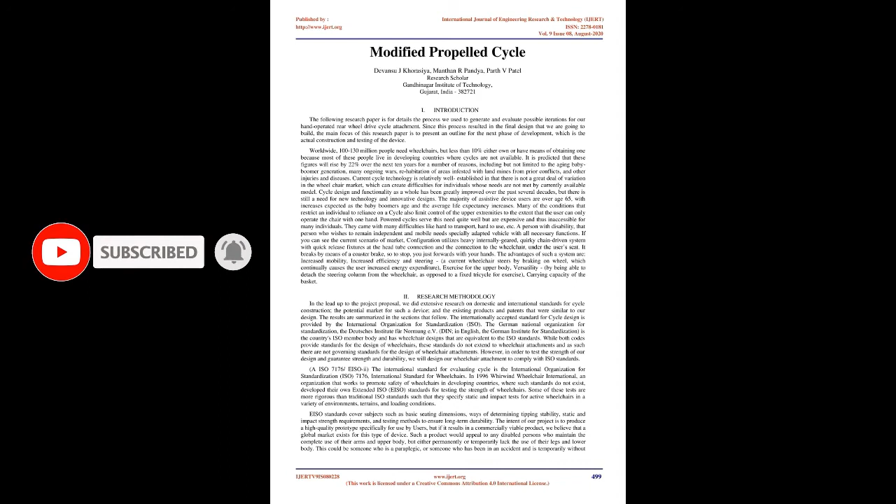The majority of assistive device users are over age 65, with increases expected as the baby boomers age and the average life expectancy increases. Many of the conditions that restrict an individual to reliance on a cycle also limit control of the upper extremities to the extent that the user can only operate the chair with one hand. Powered cycles serve this need quite well but are expensive and thus inaccessible for many individuals. They come with many difficulties like being hard to transport, hard to use, etc.

A person with a disability who wishes to remain independent and mobile needs a specially adapted vehicle with all necessary functions. In the current market, the configuration utilizes a heavy internally geared, quirky chain-driven system with quick-release fixtures at the head tube connection and the connection to the wheelchair, under the user's seat. It brakes by means of a coaster brake, so to stop, you just push forwards with your hands.

The advantages of such a system are increased mobility, increased efficiency, and steering. A current wheelchair steers by braking one wheel, which continually causes the user increased energy expenditure. Exercise for the upper body, versatility, by being able to detach the steering column from the wheelchair, as opposed to a fixed tricycle for exercise, and carrying capacity of the basket.

2. Research methodology. In the lead up to the project proposal, we did extensive research on domestic and international standards for cycle construction, the potential market for such a device, and the existing products and patents that were similar to our design. The results are summarized in the sections that follow.

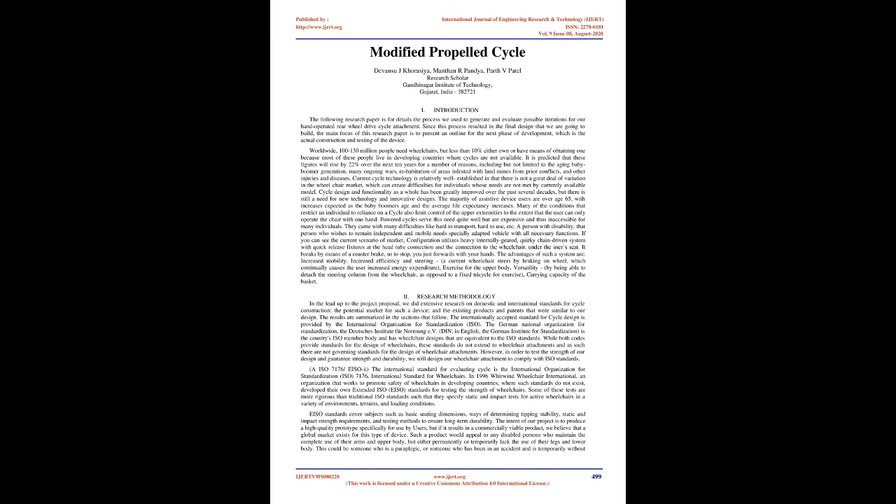The internationally accepted standard for cycle design is provided by the International Organization for Standardization, ISO. The German National Organization for Standardization, the Deutsches Institut für Normung, DIN, in English the German Institute for Standardization, is the country's ISO member body and has wheelchair designs that are equivalent to the ISO standards.

While both codes provide standards for the design of wheelchairs, these standards do not extend to wheelchair attachments, and as such there are no governing standards for the design of wheelchair attachments. However, in order to test the strength of our design and guarantee strength and durability, we will design our wheelchair attachment to comply with ISO standards.

ISO 7176/EISO, the international standard for evaluating cycles, is the International Organization for Standardization ISO 7176, the international standard for wheelchairs. In 1996 Whirlwind Wheelchair International, an organization that works to promote safety of wheelchairs in developing countries, where such standards do not exist, developed their own extended ISO, EISO, standards for testing the strength of wheelchairs.

Some of these tests are more rigorous than traditional ISO standards, such that they specify static and impact tests for active wheelchairs in a variety of environments, terrains, and loading conditions. EISO standards cover subjects such as basic seating dimensions, ways of determining tipping stability, static and impact strength requirements, and testing methods to ensure long-term durability.

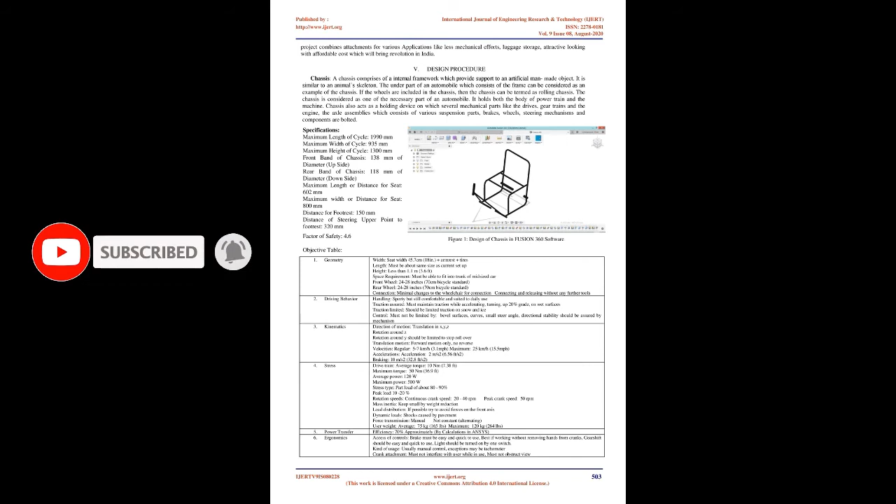E. Universal joints. A universal joint is a joint in a rigid rod that allows transfer of rotary motion of the rod, while allowing the rod to bend at an angle, usually up to 45 degrees. Universal joints are used in series to raise the angle that a rigid shaft can bend and still permit transfer of rotary motion. U-joints are commonly used in a variety of light and heavy-duty applications including automotive applications. U-joints are strong and readily available and can transmit high torque and high-speed rotation.

F. Rear drive method. The rear drive method subsystems are basically ideas for the mechanism that will transfer power of driving from the steering of cycle to the drive wheels. This mechanism is easy to semi-permanently mount to the wheelchair frame with minimal modification to the wheelchair. Final design is selected from the analysis of the following configurations because we need to maintain the modified mechanism of steering that the wheelchair utilizes without having any frictions engaged, and still maintain efficient power transfer.

G. Propelled drive. A tricycle/cycle which may be propelled by the arms of the rider and that is supported thereon in a prone position. The forward or drive wheel is driven by the rider as he grasps a pair of hand grips which respectively are rotatively attached to a pair of opposing crank members. A typical coaster brake couples the crank members to the drive wheel to enable the rider to cease turning the crank members for coasting, steering, and braking purposes.

A slide bar is included which is established in part by one of the crank members and enables one of the hand grips to be shifted from a drive position wherein the hand grips are radially displaced 180 degrees from the other to a coaster steering position wherein the hand grips are radially aligned one with the other.

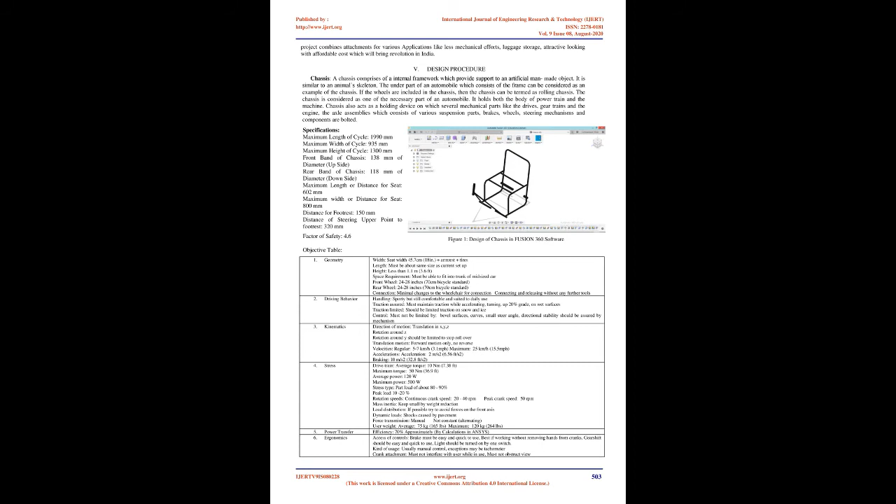I. Braking and propulsion. Cycle moves forward and reverses directions by propulsion system and brake must be able to slow down the cycle in addition to bringing it to a stopping position. As we know the basic function of brakes is to slow or stop moving wheels to prevent loss of control of cycle. In the general practical uses of modified propelled cycle we considered 35 pounds of grip force to actuate. Individuals with disabilities and the elderly both may have moderate to severely diminished physical strength capabilities compared to able-bodied adults.

J. Working principle. When the user applies his/her efforts on steering in forward and reverse direction, crank and connecting rod provide the motion to the wheelchair by converting the to and fro motion into rotary motion. Simply, the user makes force on the steering to move the steering forward and backward. The direction of motion of the cycle is controlled by steering.

K. Concepts. We tried to standardize the process of generating concepts by using a blank wheelchair template for our sketches. We assigned names for each concept based on the options for each as given by the decision matrix. For every concept we considered the power transfer, rear drive type, coupling, gear shift, braking solutions, etc. Each concept has their different advantages and disadvantages, and all concepts have their own abilities. From all those concepts we have to choose one with the highest effectivity.

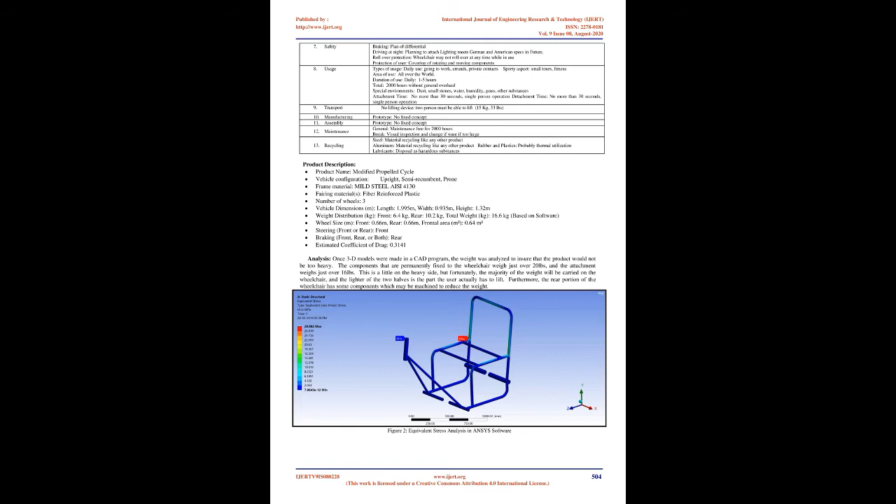Physically handicapped people have many problems. Assuming little or no use of legs or feet, particularly since paraplegia springs to mind, they very often have difficulties rising from bed, getting into their chair, dressing below the waist, moving from chair to toilet and back, and wiping themselves before returning, reaching for any items on or above standard height vanities and kitchen cabinets and above center line in refrigerators, finding and using common furniture such as couches and recliners, getting through house doors, especially closing doors behind them,

getting from door to parking lot over curbs, getting from chair to vehicle, sometimes riding in their own chair in a specially equipped van, driving, exiting their vehicle, usually but not always made easier by a rear exit ramp, getting from parking lot into many institutions or places of business over curbs and up steps and over thresholds, reaching over standard height counters, reaching higher grocery store shelves and cooler cases, fueling their vehicles at self-serve stations,

getting around in narrow business aisles, especially when normally abled people have parked their shopping carts in the middle of the aisle and are jabbering to someone on a cell phone, traveling by any form of mass transit, bus, train, airplane, passing through metal detectors. One of the main problems faced by disabled peoples in this modern era is the high cost of the equipment used in facilities provided for them, which leads to less productivity and more labor work in cultivating workshops.

In order to minimize the problems of disabled peoples, we have designed an economical and affordable modified propelled cycle which can perform very effectively for them. In order to maximize the benefits of the product, we have also planned our design so that normal people can also use the product in place of today's era's costly vehicles. We are planning to use some attractive looks and materials in the fabrication process, as well as designing our product to give the highest comfort level to the customer.

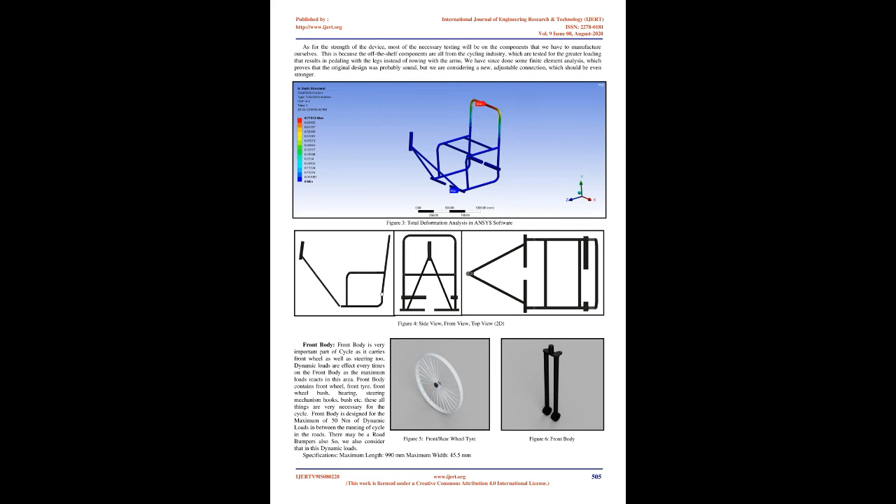This project deals with the solution of basic problems faced by the poor people of India, like the high equipment cost used in manufacturing and high labor cost, which ultimately leads to less productivity of cycles. Moreover, this project combines attachments for various applications like less mechanical effort, luggage storage, attractive looks with affordable cost, which will bring revolution in India.

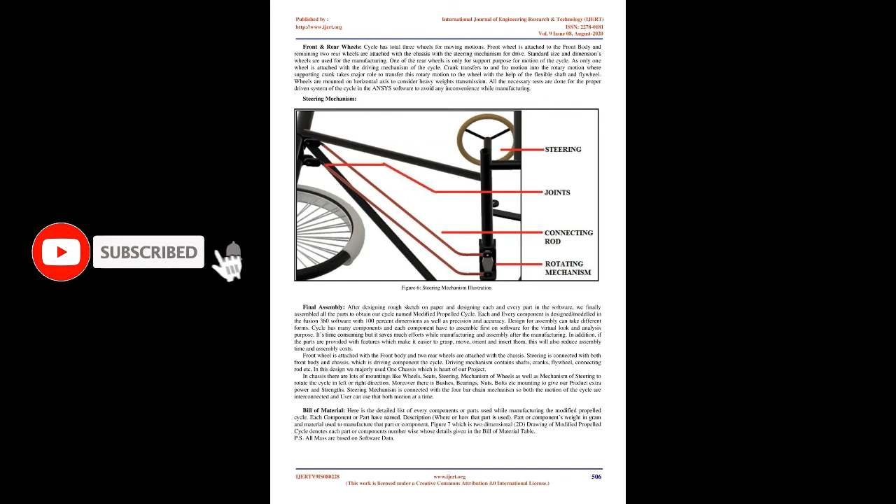V. Design procedure. Chassis. A chassis comprises an internal framework which provides support to an artificial man-made object. It is similar to an animal's skeleton. The underpart of an automobile, which consists of the frame, can be considered as an example of the chassis. If the wheels are included in the chassis, then the chassis can be termed a rolling chassis.

The chassis is considered one of the necessary parts of an automobile. It holds both the body of powertrain and the machine. Chassis also acts as a holding device on which several mechanical parts like the drives, gear trains and the engine, the axle assemblies, which consist of various suspension parts, brakes, wheels, steering mechanisms and components, are bolted.

Specifications. 6. Ergonomics. Access of controls. Brake must be easy and quick to use, best if working without removing hands from cranks. Gear shift should be easy and quick to use, light should be turned on by one switch. Kind of usage, usually manual control, exceptions may be tachometer. Crank attachment must not interfere with user while in use, must not obstruct view.

7. Safety. Braking, plan of differential. Driving at night, planning to attach lighting that meets German and American specs in future. Rollover protection, wheelchair may not roll over at any time while in use. Protection of user, covering of rotating and moving components.

8. Usage. Types of usage: daily use, going to work, errands, private contacts, sporty aspect, small tours, fitness. Area of use, all over the world. Duration of use, daily, 1 to 5 hours. Total, 2,000 hours without general overhaul. Special environments: dust, small stones, water, humidity, grass, other substances. Attachment time, no more than 30 seconds, single person operation. Detachment time, no more than 30 seconds, single person operation.

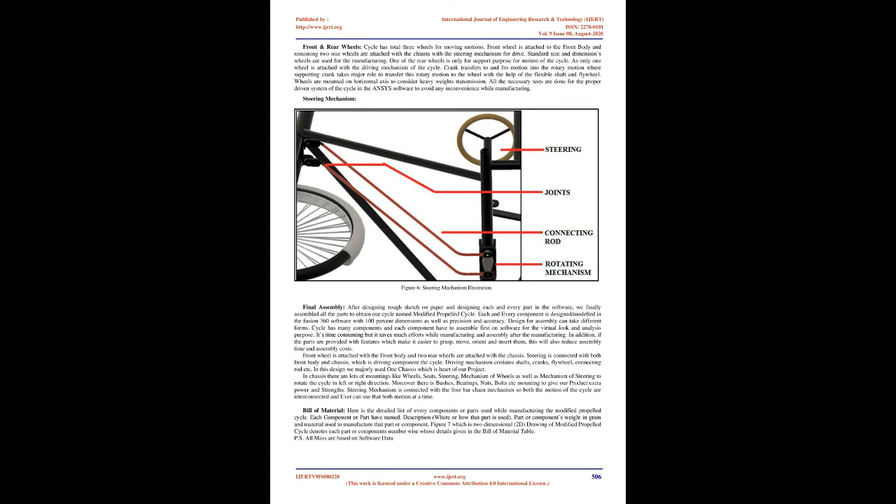9. Transport. No lifting device, 2 persons must be able to lift, 15 kilograms, 33 pounds. 10. Manufacturing. Prototype, no fixed concept. 11. Assembly. Prototype, no fixed concept. 12. Maintenance. General, maintenance free for 2,000 hours. Brake, visual inspection and change if wear is too large.

13. Recycling. Steel, material recycling like any other product. Aluminum, material recycling like any other product. Rubber and plastics, probably thermal utilization. Lubricants, disposal as hazardous substances.

Product description. Product name, modified propelled cycle. Vehicle configuration: upright, semi-recumbent, prone. Frame material, mild steel AISI 4130. Fairing material, fiber reinforced plastic. Number of wheels, 3. Vehicle dimensions in m: length 1.995 m, width 0.935 m, height 1.32 m.

Weight distribution in kg: front 6.4 kilograms, rear 10.2 kilograms, total weight 16.6 kilograms, based on software. Wheel size in m: front 0.66 m, rear 0.66 m. Frontal area, 0.64 square meters. Steering, front. Braking, rear. Estimated coefficient of drag, 0.3141.

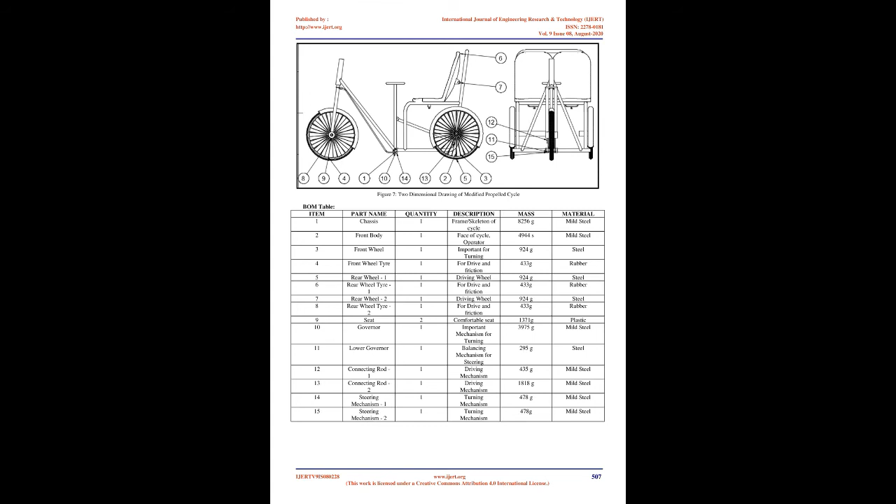Front body. Front body is a very important part of the cycle as it carries the front wheel as well as steering too. Dynamic loads affect the front body every time, as the maximum loads react in this area. Front body contains front wheel, front tire, front wheel bush, bearing, steering mechanism hooks, bush etc. These all things are very necessary for the cycle.

Front body is designed for the maximum of 50 newton meters of dynamic loads in between the running of cycle in the roads. There may be road bumpers also, so we also consider that in these dynamic loads. Specifications: maximum length 990 mm, maximum width 45.5 mm.

Front and rear wheels. Cycle has total 3 wheels for moving motions. Front wheel is attached to the front body and remaining 2 rear wheels are attached with the chassis with the steering mechanism for drive. Standard size and dimensions wheels are used for the manufacturing. One of the rear wheels is only for support purpose for motion of the cycle, as only one wheel is attached with the driving mechanism of the cycle.

Crank transfers to and fro motion into the rotary motion, where supporting crank takes major role to transfer this rotary motion to the wheel with the help of the flexible shaft and flywheel. Wheels are mounted on horizontal axis to consider heavy weights transmission. All the necessary tests are done for the proper driven system of the cycle in the ANSYS software to avoid any inconvenience while manufacturing. Steering mechanism.

Final assembly. After designing rough sketch on paper and designing each and every part in the software, we finally assembled all the parts to obtain our cycle named Modified Propelled Cycle. Each and every component is designed/modeled in the Fusion 360 software with 100% dimensions as well as precision and accuracy.

Design for assembly can take different forms. Cycle has many components and each component has to be assembled first on software for the virtual look and analysis purpose. It's time consuming, but it saves much effort while manufacturing and assembly after the manufacturing. In addition, if the parts are provided with features which make it easier to grasp, move, orient and insert them, this will also reduce assembly time and assembly costs.

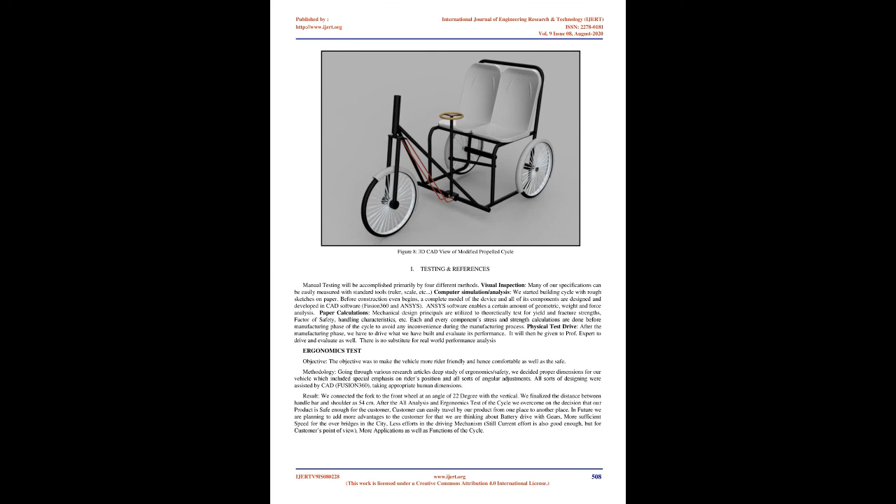Manual testing will be accomplished primarily by 4 different methods. Visual inspection. Many of our specifications can be easily measured with standard tools, ruler, scale, etc. Computer simulation/analysis. We started building cycle with rough sketches on paper. Before construction even begins, a complete model of the device and all of its components are designed and developed in CAD software, Fusion 360 and ANSYS. ANSYS software enables a certain amount of geometric, weight and force analysis.

Paper calculations. Mechanical design principles are utilized to theoretically test for yield and fracture strengths, factor of safety, handling characteristics, etc. Each and every component's stress and strength calculations are done before manufacturing phase of the cycle to avoid any inconvenience during the manufacturing process.

Physical test drive. After the manufacturing phase, we have to drive what we have built and evaluate its performance. It will then be given to professor expert to drive and evaluate as well. There is no substitute for real-world performance analysis.

Ergonomics test. Objective. The objective was to make the vehicle more rider-friendly and hence comfortable as well as safe. Methodology. Going through various research articles, deep study of ergonomics/safety, we decided proper dimensions for our vehicle, which included special emphasis on rider's position and all sorts of angular adjustments. All sorts of designing were assisted by CAD, Fusion 360, taking appropriate human dimensions.